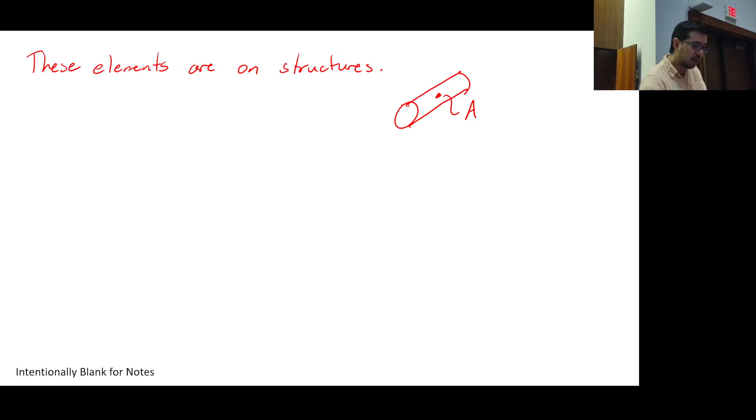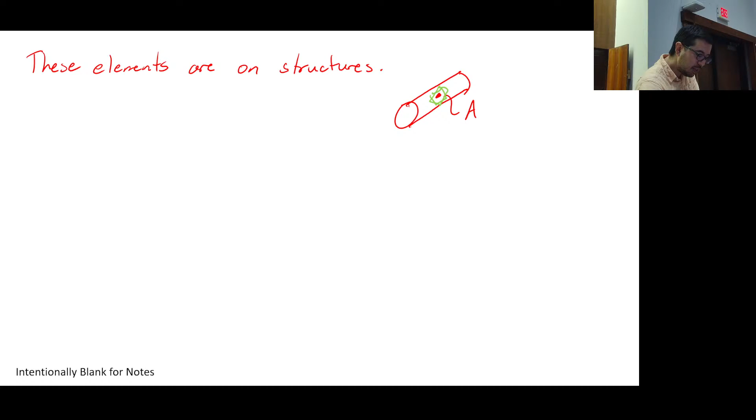So if it's a cylindrical cross section or a cylindrical pressure vessel, and I pick a point there and call it A, I have all kinds of options for how I would orient this element. I could orient it like this, I could orient it like this, I could orient it through the surface if I wanted.

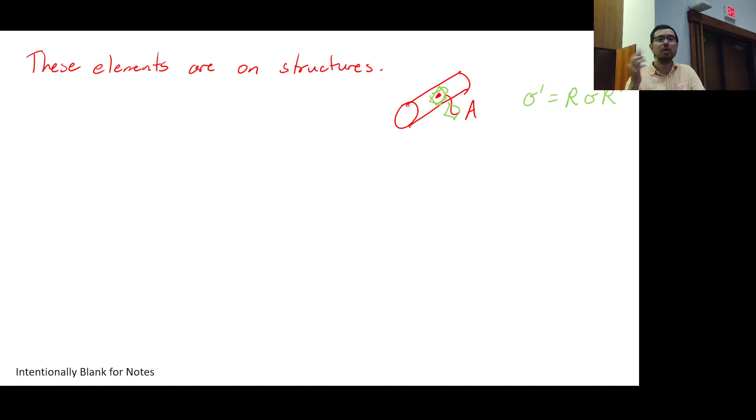As we were showing at the end of the last session and in the last homework problem, if you have a tensor sigma, we can use these rotation matrices to get sigma prime. And it doesn't just have to be about the axis normal to the page. We're going to spend a lot of time on in-plane stresses, that's kind of the scope. We've got enough issues to resolve in 2D, let alone trying to make it all 3D. So the first point is that these elements are on structures and they're at locations.

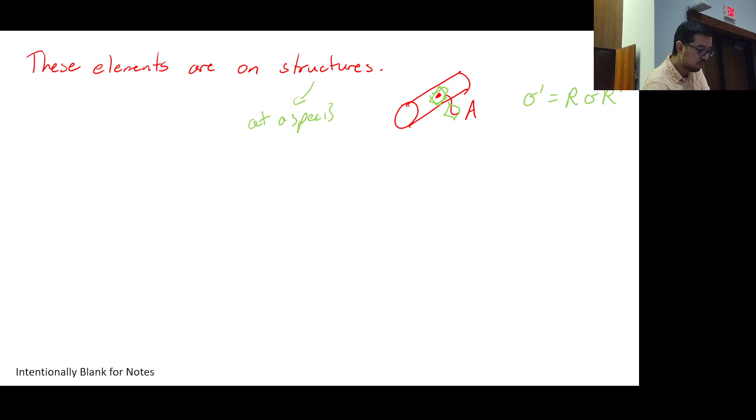And they're on structures at a specific location. And once we've got that worked out, then it becomes kind of just math, or some visualization of what's happening. What do I mean by that?

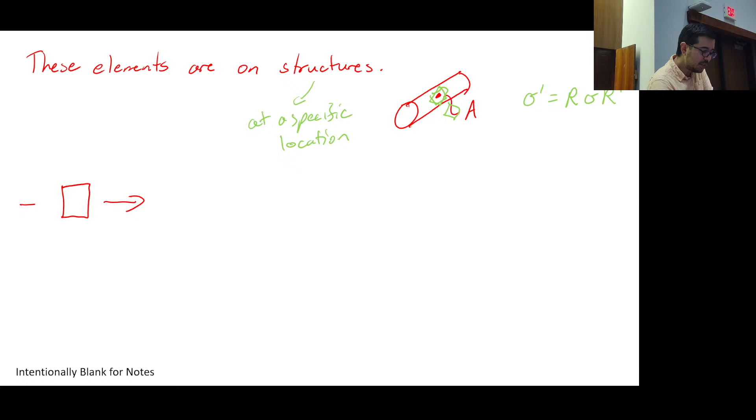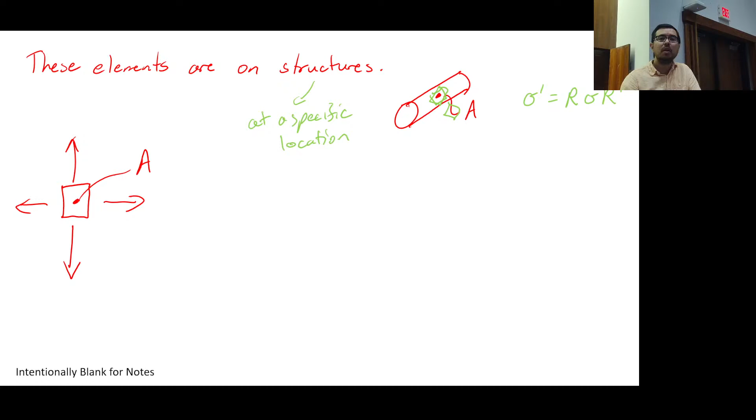I mean, if I've got this element, and I've got my state of stress, and it's something like this, then I kind of forget about the structure a little bit. Now I'm just in my little material world, and this would be that point A, if you will. But I've got to define my axes, X and Y, and then Z would be coming out of the board.

So we're going to spend a lot of time today, Tuesday, Friday, talking about what's happening just at some location. We're going to really be removed from these structures. Well, actually that's not true, we'll have this — yeah, the homework problems do talk about a structure at a location. But what we're really getting at is what is happening at these material elements, and in terms of when you rotate 45 degrees.

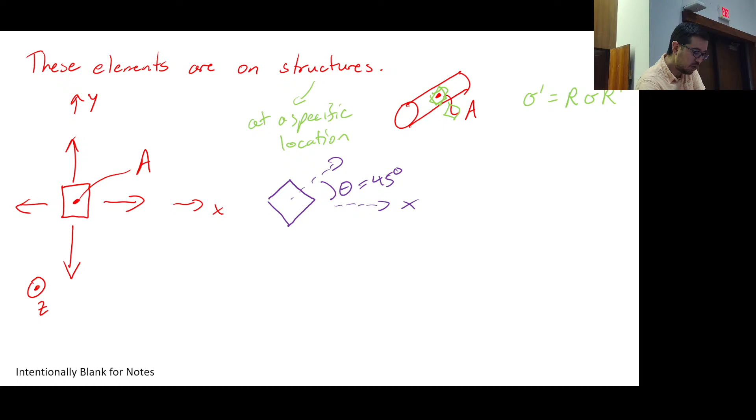You take this element and rotate it 45 degrees. What does that really mean? Well, we had our x like this, and now we've got this x prime, which could be the 45 degrees coming out. And we have our y prime coming out like this.

Yes, for this particular situation, we're going to have the buildup of shear stresses. I can say casually that the math says that's going to be so because we do the method of sections. But you're still going to have these normal stresses too. This is because experience and the math dictate these results.

Sometimes what you've got to think about is these stresses on the left, the sigma x and the sigma y, they're still present. It's kind of like these are your friends, and now you took your house that might have been right here, and said, oh, I'm going to twist it 45 degrees. This element, you could still visualize as being under these two normal stresses.

What's going to happen to your house? It's going to be elongated more in the vertical direction and elongated less in the horizontal — I meant to make the y's larger than the x's. It's going to be stretched more in the vertical direction than in the horizontal direction.

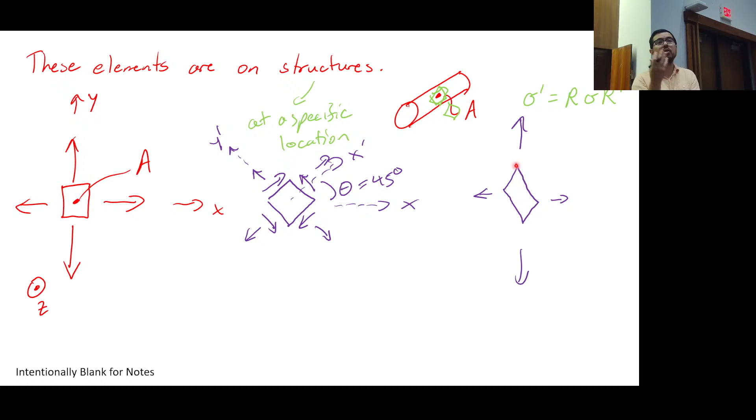Just taking a little bit of a step back and thinking about what we're doing, because we're going to spend a lot of time doing some of the math. Once again, for many of these questions, you've got to ask yourself: is it going up or down? Is it increasing or decreasing? Is it positive or negative? Before you even do the calculations.

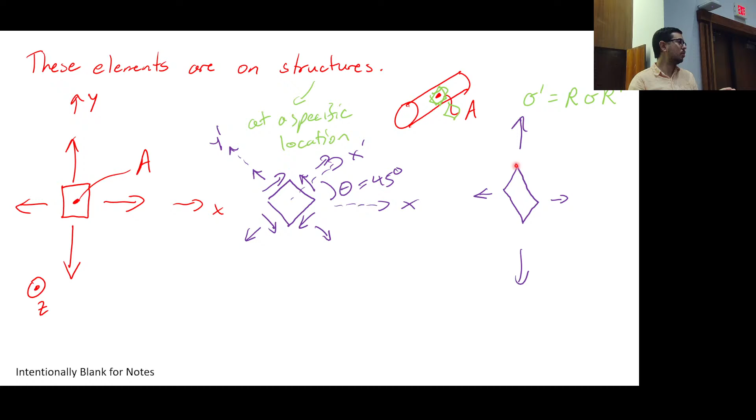All right, well, let's go. So today we're going to talk about what are called in-plane principal stresses, and also what are called in-plane maximum shear stresses. Then we're going to calculate these in-plane principal stresses and in-plane max shear stresses. We're actually going to calculate them in parts 1 and 2, but we're going to essentially analytically derive ways of calculating them in parts 3 and 4.

Let's take a look at a review from session 17. So we've got these elements, and we have states of stress, typically in 2D. So we have x, y, and z coming out of the board, so theta is about z, and we're typically rotating about z. So that we get again the sigma x prime, sigma y prime, and the tau x prime, y prime.

As we do this, it's probably not a bad idea to remember how the slicing relates to the angle of rotation. So if you have something like this, you're going to take a slice, and you see this was a smallish angle here, and down there a smallish angle too. You see that this surface we've created is going to be the surface of this new rotated material element — essentially the x prime face. So we see that's the angle theta there.

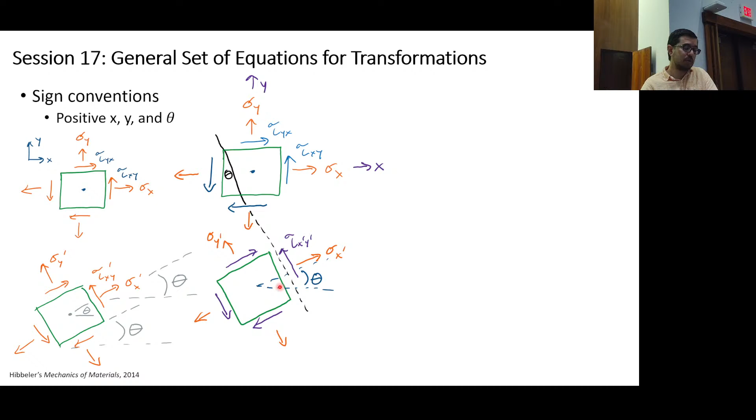We can draw the sigma x prime coming out of the x prime face and the corresponding stresses. We know that if we want to go between the sigma x, sigma y, tau xy, and the sigma x prime, sigma y prime, tau x prime y prime, the approach we have taken so far is to use equilibrium and the method of slices.

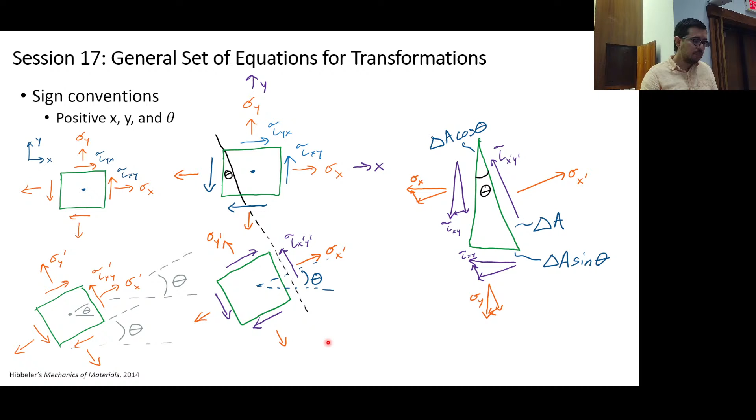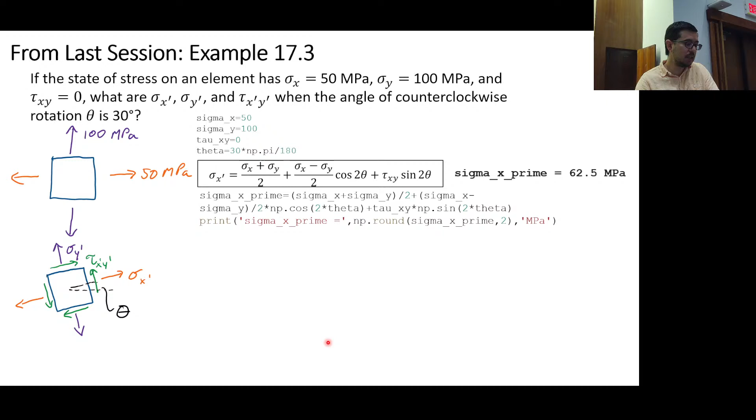Okay, so near the end of the last session, we said there are some generalizable equations. You don't have to do this breakdown every single time. Method of slices - we can just write out these equations, and then go ahead and calculate

what the sigma x prime, the tau x prime, y prime, and the sigma y prime might be. And when we do that - should I do it? Sure, we'll try. I don't know if we'll do it successfully, but let's see here. That's really small. Okay.

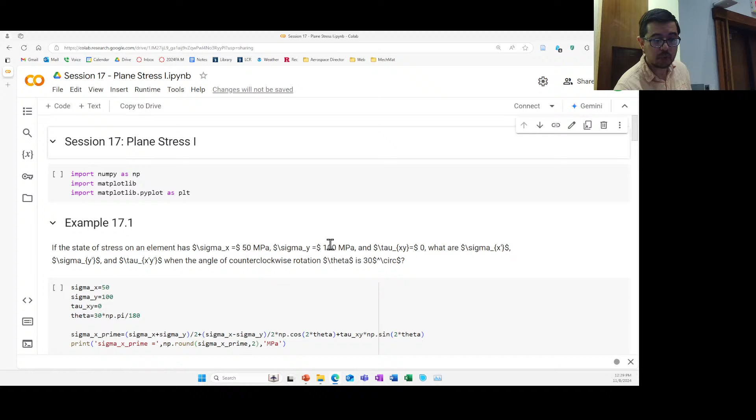So if we go to the website and scroll down over here, and scroll up - so we kind of did this already, but it's not, at least in videos afterwards, that tricky, to go ahead and run. That's just Control Enter. Is this 17.3?

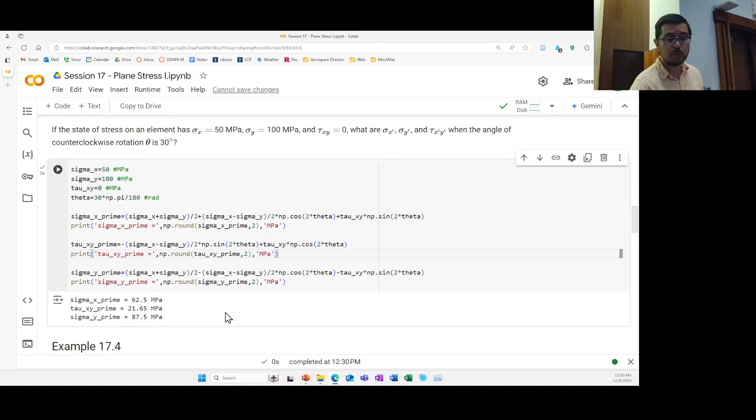Yeah, so we can go ahead and plug in our sigma x, our sigma y, our tau xy, and plug in an angle, and get a response - get the new sigma x prime, sigma y prime, and tau x prime, y prime. Or what we can do is run through a range of angles.

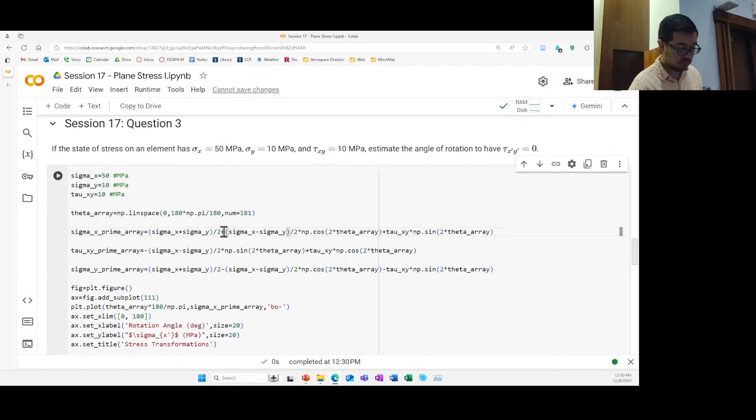So if you look here, do you see that we have a cosine 2 theta and a sine 2 theta? And so we're rotating - the angle is changing, we're rotating, okay?

In order to completely map out all possible solutions, what angles do I need to specify? Or what range of angles should I specify to map out all solutions? 0 to 180, right? Because I've got 2 theta there - 2 theta means 2 times 180 is going to be 360, and I'm just going to keep cycling around. So the math tells us that here, it tells us that here, and it tells us that here.

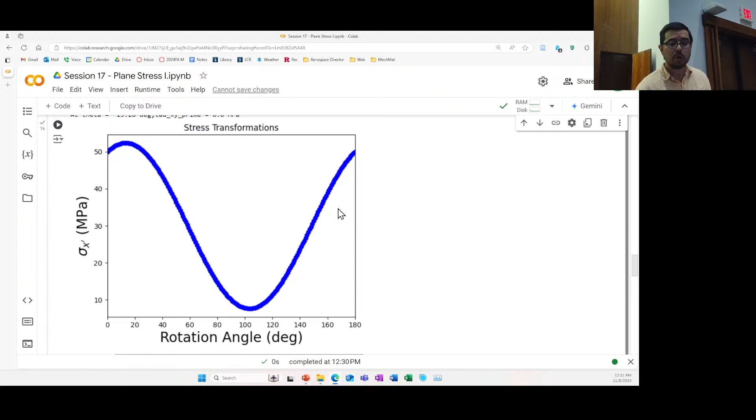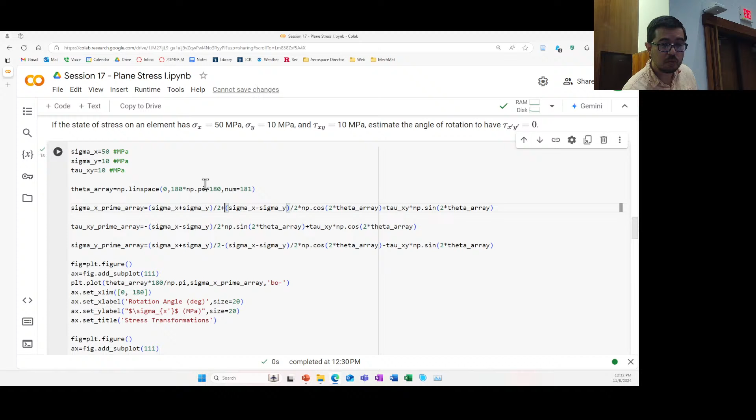And this 2 theta is going to come back in some other graphical depictions next time we meet. But the point is, when you're putting this into Python or whatever coding, or Excel, you can specify the range over which you're going to run these - we're doing 0 to 180. Now be careful, this is in radians. So if I want to go from 1 degree, I had to multiply by pi over 180.

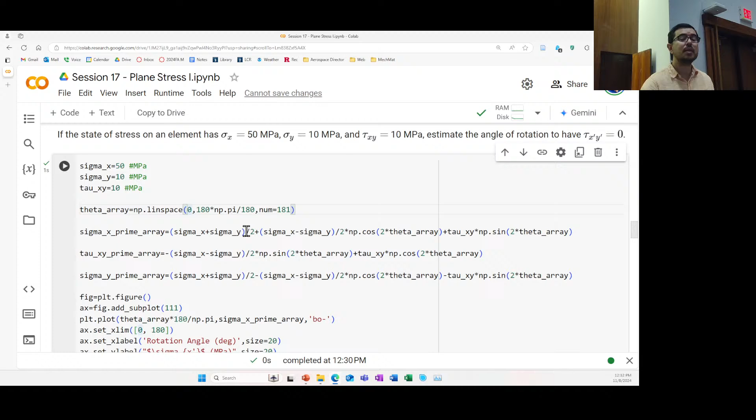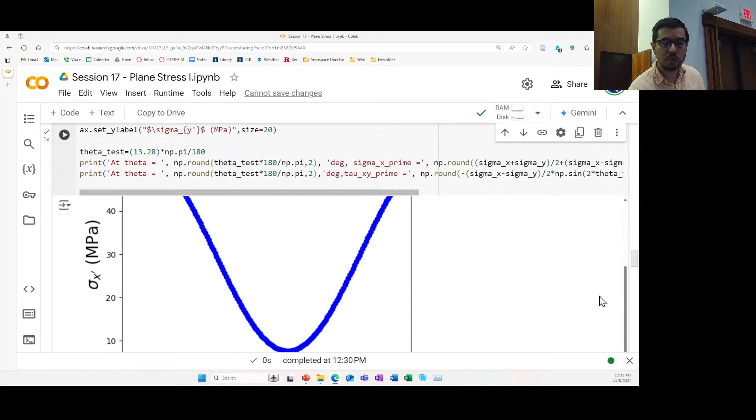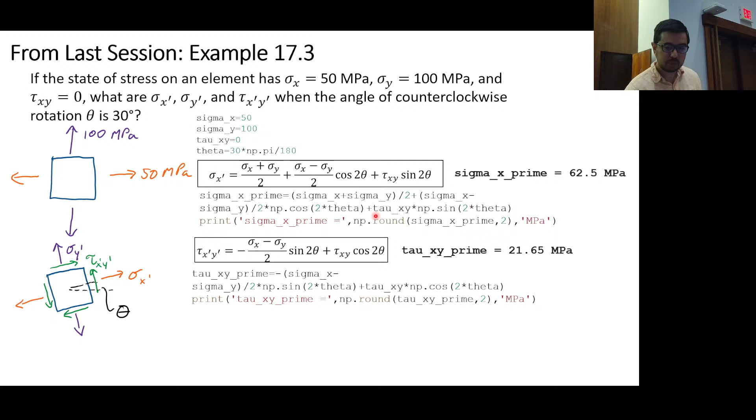Okay, because that's how NumPy is handling these trigonometric calculations. But you can see that if we go through the range like we see here, we're just going from 0 to 180. Okay, and then - okay, we come back here. Oops, wrong direction. Okay.

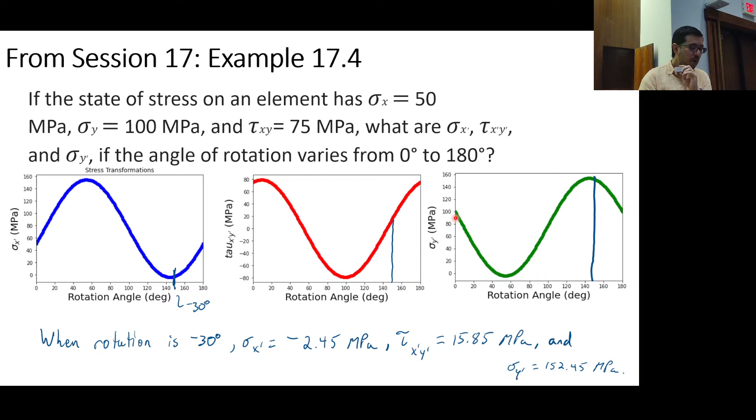Look at it—you're here, let's say I go 180 degrees, that's zero, and then I go 180 degrees again, boom, sigma x prime is back where sigma x was originally. Boom, tau x prime y prime is back where it was originally. Boom, sigma y prime is back where it was originally.

So if we look at what happens when you rotate an element 180 degrees, we started off like this.

Okay, this was sigma x, and this was sigma y up here. Now this sigma x is all the way over here, but this was sigma x already, right? It's now on the minus x face, the original x face, but that's the same. The sigma y is all the way down here, same. And the more confusing one is, what happened to tau xy? Look, they're pointing up here, and let's say this corner now goes down here, they're still pointing inside. So with 180 degrees rotation, you're back where you started.

I'm asking this because yesterday I was doing the homework, and I plugged in 180, but it turned part of the equation negative and gave me a wrong answer. So should we, if it's 180, always make it zero so that it's positive?

No, but there was also an error I corrected in one of the Colabs, so it depends on which one. There was one where sigma x prime and tau x prime y prime were correct, but I missed the minus signs in sigma y prime. I corrected it this morning. So if sigma y prime was giving you the wrong answer, it's because sigma y prime was not actually calculated correctly. I don't think so, but I could be wrong.

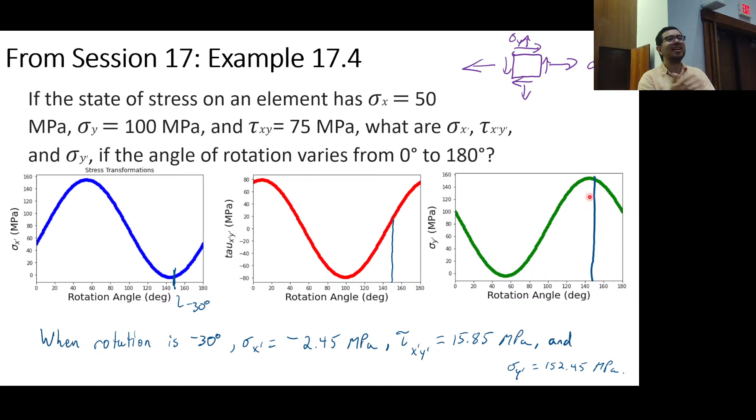I wish life were like that a lot of times. I just want that to work, but it doesn't work that way. In the lab, I have this philosophy that it never works the first time. And in life, sometimes I've gone through having low expectations and then I'm pleasantly surprised when things work out. But it turns out that's a bad way to approach life. You want to aim high.

Just to confirm, based on what we said, we were rotating it from the right to the left. In question 4 of the homework, where it says the axis becomes the y-axis, does that mean they were rotating the box this way? That's right, that's what I was trying to show in the video. Look, x and x prime are the same. I took a 2D element and made it 3D, and then we said it's flipping in this direction toward you, 90 degrees.

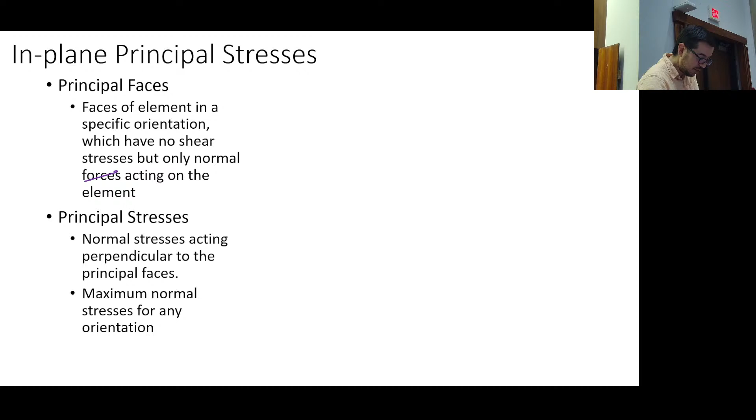So that was a long digression, but hopefully that was interesting for a few of you. All right, so in-plane principal stresses. What we're saying is that the faces of an element in a specific orientation have no shear stresses, only normal stresses acting on the element. Why did I say forces? That should be stresses.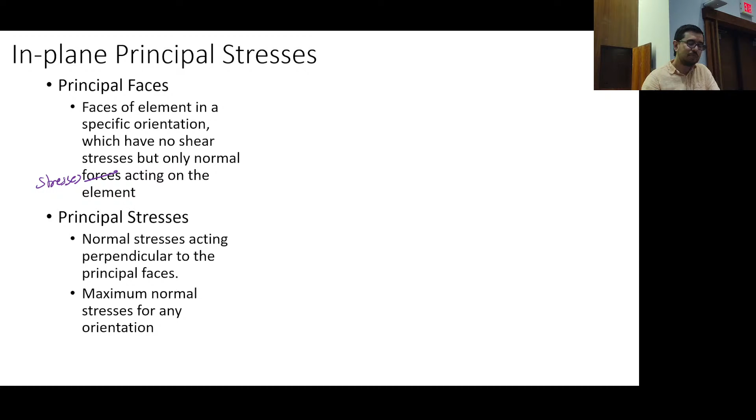Yes, we can associate normal stresses with normal forces, but we're talking about getting to a state where you have no shear stress. This is in-plane, so you can do this if you're given a 2D state of stress. So what we're saying here is that there's no tau xz, no tau yz, no sigma z. You have six stresses describing the state of stress in 3D. In 2D, we've only got three: sigma 1, sigma 2, and tau 1,2.

So we're saying we're going to figure out how to rotate this element by some amount, and we're going to call that theta sub p, such that we only have normal stresses. So that might have been sigma x. There's the angle theta p, and now we have our sigma 1 and our sigma 2.

This is where maybe a little bit of convention gets confusing. Yes, we've done sigma 1, sigma 2, sigma 3, sigma 1,2, sigma 1,3, sigma 2,3 for FEA. Now, even just 2 seconds ago I said sigma 1, sigma 2, tau 1,2, but now, very specifically, sigma 1 and sigma 2 refer to what we call principal stresses. And there's no need to describe a tau 1,2 because tau 1,2 here is 0 — the shear stresses are 0.

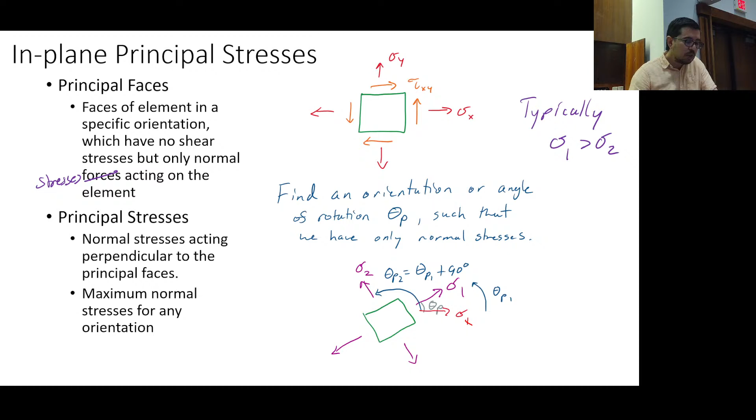So let's go ahead and do a little example. Here we have — and it's clear, right? Anytime tau xy is not 0, that is not the state of principal stresses, because tau is not 0. So if they give you tau equal to 0 there, then you're like, what am I doing?

Probably trying to find maximum shear stresses or something else, which would be 45 degrees — but anyway, we'll talk about that later. Here we have sigma x equals 50 megapascals, sigma y is 100 megapascals, tau xy is 10 megapascals. So what are the in-plane principal stresses, and what is the associated angle of rotation?

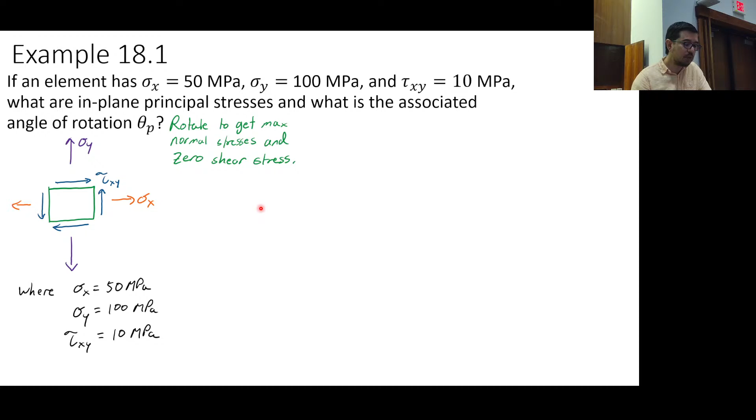So this is in plane. So we got to rotate to get max normal stresses and 0 shear stress. So we want to do something like this. That's our goal, and we got to figure out what that theta p is to do that.

One way to do it is the trial and error method, or the brute force technique. So we go into Colab, and you can do this — I played with Colab a little bit. We better keep going though, I better not go to Colab right now.

And that's my angle, and that's going to be my principal stress, theta at theta p1. Okay, just like that. Yes.

Could we just do what we did in question 2 of 17, where you find where tau x prime y prime is equal to 0, and then you get an angle? You can do that too, right? So that's another way to look at things, right? And theta p2 will be 90 degrees out, right?

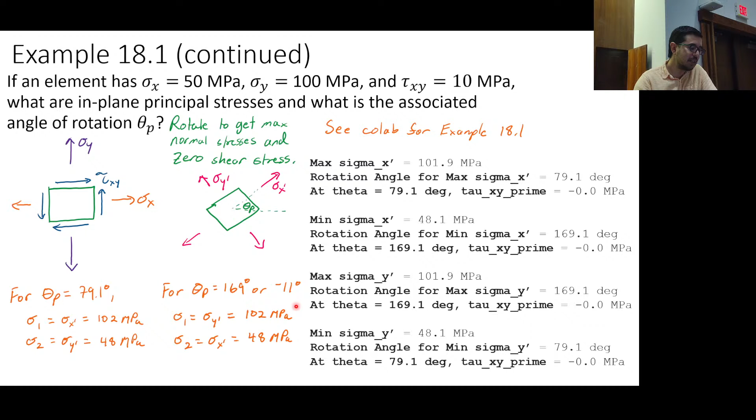And so we have these other principal stresses, which are the same as they are here. Okay, but notice that now sigma 1 is sigma y prime instead of sigma x prime, and sigma 2 is sigma x prime instead of sigma y prime. Okay, because we rotated the other direction, or we rotated another 90 degrees. Right, you see it's 169 degrees or minus 11 degrees to get there. Great. Questions? Okay.

Now, here's another one. Okay, if an element has sigma x equals 50 megapascals, sigma y equals 100 megapascals, and tau xy equals 0 megapascals, what are the in-plane principal stresses and what is the associated angle of rotation?

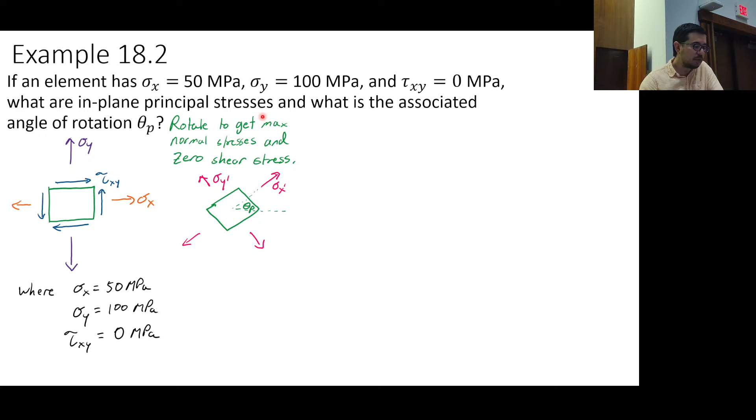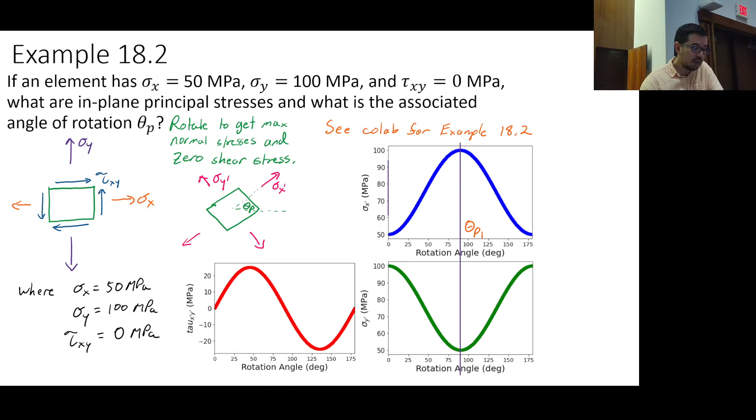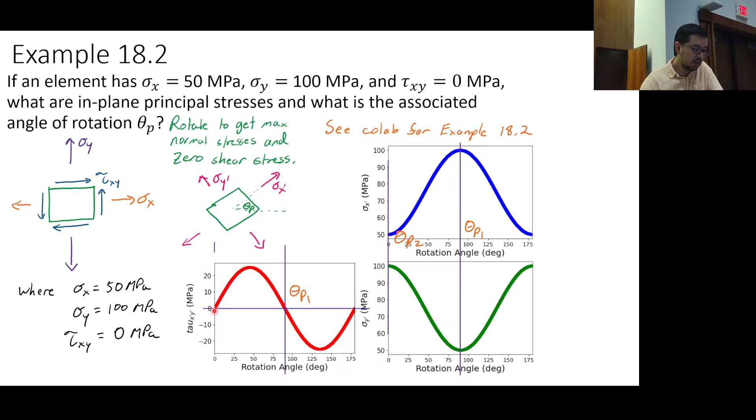Okay, so here, all right, we already have tau xy equal to 0, okay? And so we can go 90 degrees off of where we are, okay, but we were already there, okay? And we can see that here. So this is at 90, this is at 0, okay? So, yeah, we can go 90 degrees, okay?

But there were no shear stresses in the original orientation. So we just get these original values, like our sigma 1 is 100 megapascals, our sigma 2 is 50 megapascals, right? But then they just flip the sigma y prime and the sigma x prime as we go to 90 degrees. All right, any questions on that?

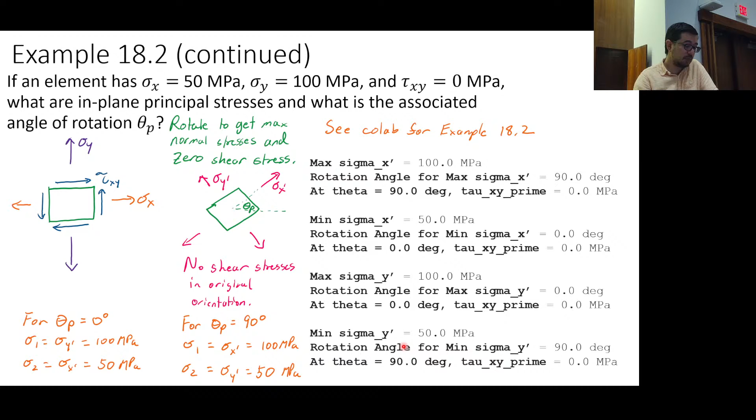So these are probably the easier of the two to understand because the next ones we're going to look at are the maximum in-plane shear stresses. Okay. And there's a question. So let's talk about what the maximum in-plane shear stresses are.

Well, this is rotation to create a state with maximum shear stress. And like I said a few minutes ago, the normal stresses in this rotated state do not necessarily go to 0. They could if it's pure shear, but given that most systems are not pure shear, I don't know. I guess it depends. It depends on what area you work.

If you are a shaft expert, then okay, what goes on your desk is going to have a lot of shear, pure shear. But if you're designing structures that are not just twisting, and I'm not judging one job over another, right? We need people who specialize in things and figuring out the material content, how do you machine these, how you get the surface roughnesses on shafts, all these things, how do you make sure the density is constant, how do you get rid of the eccentricities, make sure things are centered.

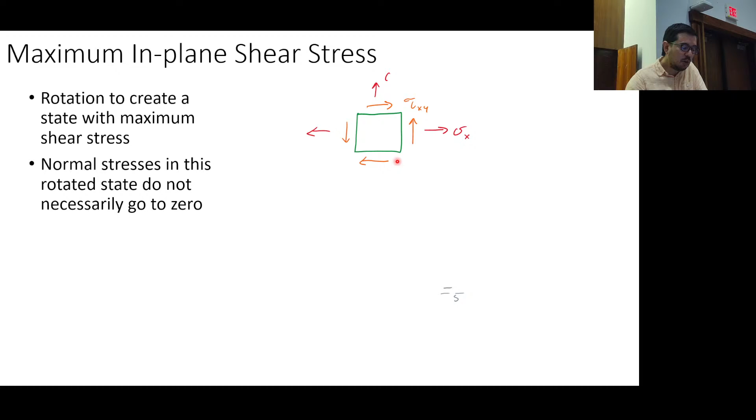There's a lot you might take for granted on a shaft. Don't shaft the shaft.

All right, so here we have a state of stress, and what we're going to do is find an orientation or angle of rotation, theta s, such that we have maximum shear stress. What's cool here is that we're only looking at one quantity, shear stress. When we have the principal stresses, you have a sigma x prime and a sigma y prime, and so you get a sigma 1 and a sigma 2.

Here, we want to figure out what the maximum shear stress is. Now, often we do figure out what the sigma x prime and sigma y prime are associated with that rotation of maximum shear stress, but really, we just care about the tau.

So it's a very similar diagram in that we have some theta sub s that we're going to try to get and achieve, and then we're going to have tau max, and we're going to have our sigma stresses associated with it.

And then once again, it's like a broken record. Theta S2 is going to be 90 degrees out of phase with theta S1. You can interestingly see things. Remember how we said there were two theta components in the stress transformation equations, and so we only had to go from 0 to 180.

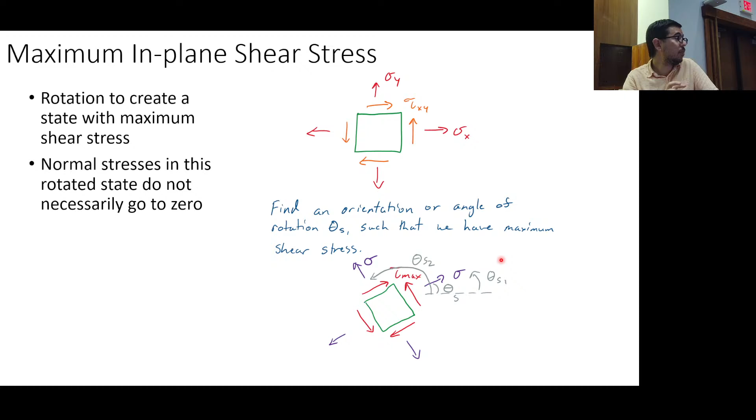So here, if we have an element, we're essentially just repeating the same thing. We're doing brute force again - put in an array of values for the thetas, and pick the one that gives you the maximum shear stress. That's what we're going for, and figure out what that orientation might be.

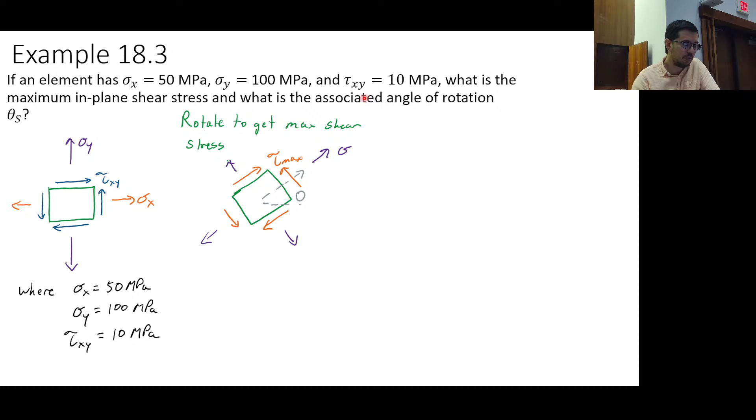So here we have sigma x equals 50 megapascals, sigma y equals 100 megapascals, and tau xy equals 10 megapascals. So we're going to rotate to get maximum shear stress. This is just a general description of what we're doing. We've got to figure out what this theta s is. You can look at the colab there.

And when you do that, these are the plots you're going to get. So where do we see the maximum shear stress? What do you all think? Can you see that? Is it too small? What angle would you take a stab at? Where is this thing maxing out?

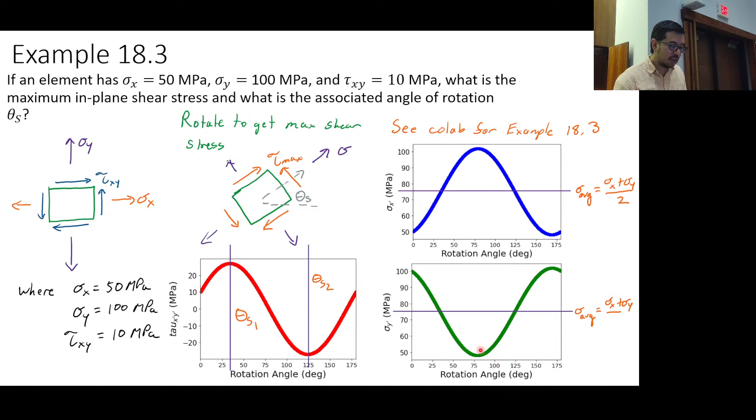And we see that the normal stress at these values is going to be something like this - it's the average. This is very interesting. What you're going to find is that the sigma x prime is the average of sigma x plus sigma y, and the sigma y prime is also going to be the average of these two.

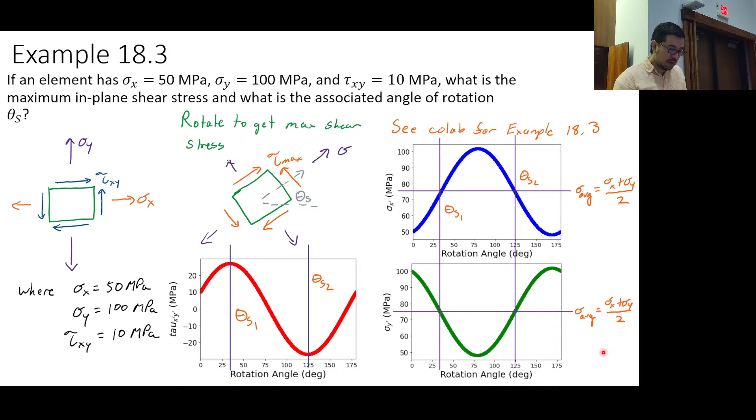So if you go ahead and do the math, you're going to find that the angle is 34 degrees or so. The tau max is 26.9 megapascals, and if you go another 90 degrees, you get the minus of that - minus 26.9. In both cases, the sigma is the average, so those normal stresses, sigma x prime and sigma y prime, work out.

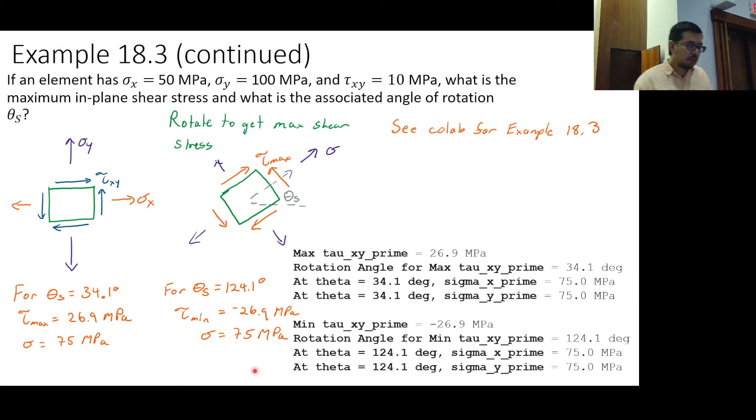All right, so let's talk now a little bit about the relationships between theta p and theta s. If you look here, this is just a general thing - what would you say is the offset between theta p and theta s? Yeah, 45. It's 45 degrees. So once you found one, you know the other one is going to exist 45 degrees off from it, and then you'll get another of the same if you go 90 degrees.

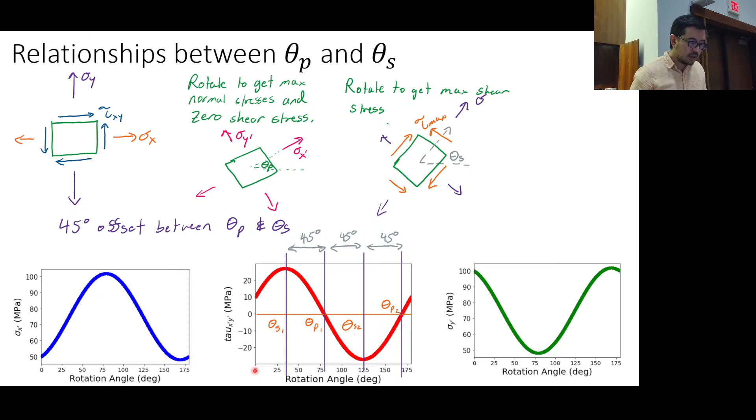So this is an interesting property - 45 degrees is what separates the maximum in-plane shear stress orientation from the maximum normal stress, or the principal stress orientation, and vice versa. A little bit more on in-plane maximum shear stress.

Shear without normal stress is possible in a special case of pure shear. This is the structure, this is pure shear on a rod that's being twisted. This is the element under pure shear. You see that? Purposely, the sigma x and the sigma y are 0.

So then the orientation of maximum shear may still have normal stresses present. Yes, that's true, but this is not. So this case is separate from this case. Just to be clear, or maybe it's not, let me just make that distinction. This is separate, so this is one case, a special case.

And that's what we're describing over here. This is pure shear. And you see this? Then we rotate this 90, or we rotate it 45 degrees, and we get to what? The normal, the state of principal stress.

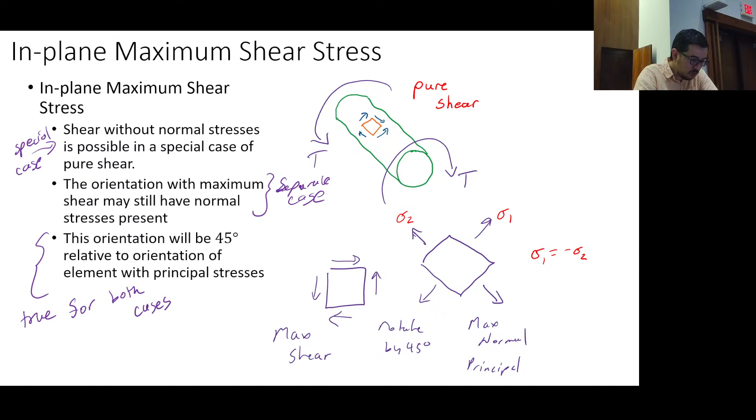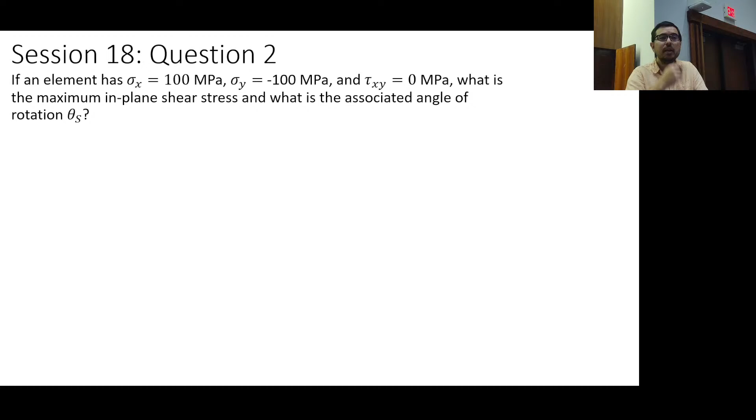Any questions on this? So this slide is just saying, look, there's a special case of pure shear. It's cool, be careful. And then the last part is just repeating what we already knew, that the state of principal stress is going to be 45 degrees off of the case for maximum in-plane shear stresses. And then there will be another question that you get to work on. You don't need me for some of these, you can just go ahead and modify a Colab if you like, and solve for these problems.

Let's talk about a little bit of calculus that allows us to come up with analytical responses to avoid shooting darts at the board to figure out where are the peaks. And if you had to guess, how do you find in calculus a local maxima or minima of a function? Yes, Stephen. Yeah, exactly, take the derivative and set it equal to 0. All right, so that's all we're going to do.

We're going to say, and you're like, why didn't we do this earlier? Well, because we were just trying to illustrate the physical nature of these rotations, and now we're shortcutting to get answers. But we've already done the physical work, we've exercised our mental physical capabilities.

So here's sigma x prime, this is the equation, the generalized transformation equation for x prime. And if we want this to be a maximum, which is what we want for the state of principal stresses, we take the derivative of this expression with respect to theta, because that's what we're varying. Yes, sigma x and sigma y can vary, but in this case we've got our sigma x and our sigma y pinned, those are constants.

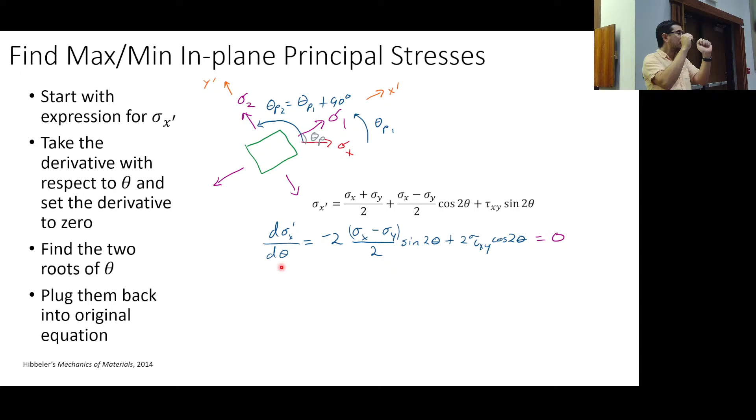The same thing with tau xy. The dependent variable is sigma x prime, of course, and the independent variable, the one on which we depend, is theta. So we're taking the derivative with respect to theta because we're trying to figure out what's that angle that gets us there. So this term drops away, this coefficient stays, but we have cosine 2 theta becoming minus 2 times that, and the sine theta becoming cosine theta, and the 2 from the inside coming out.

So we've taken the derivative, we're setting it equal to 0, and then we've got to solve for theta. We can write it out like this. We see a sine, we see a cosine, they're on opposite sides. Sine divided by cosine is tangent. So we get now an expression, tangent of 2 theta is equal to this mess. And we can say that now theta is going to be equal to theta P1 or theta P2.

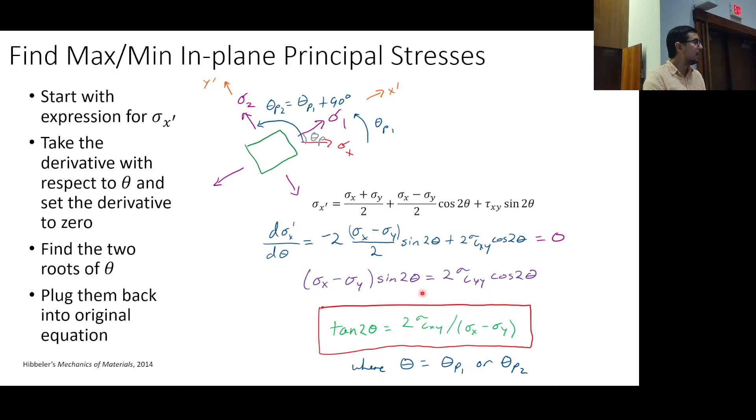This is not an equation that I go home and dream about, it's just useful. Maybe you'll see why once we do some other things later on. This is not how I think about these problems, and not how you'll think about them after this exam, or maybe even after the next session.

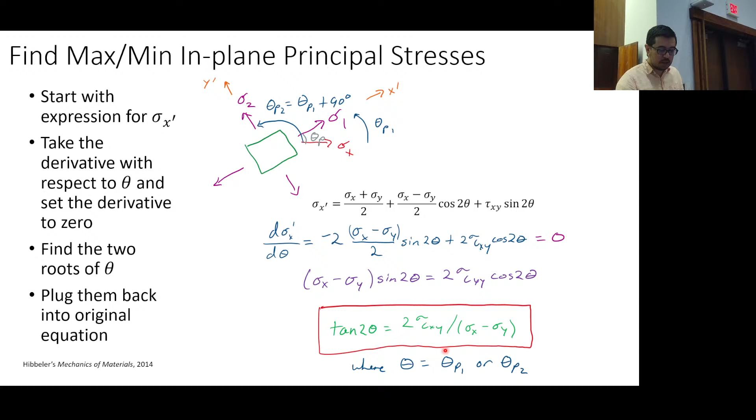But this equation exists, and we can plug in. This is the equation that's going to dictate the angles of rotation, and we can do something kind of fun with it. Not something I'd do on a weekend, but we'll do it on a weekday.

You see we have this expression, tangent of 2 theta, and we can rewrite it as tau xy over this quantity. What is the definition for tangent? SOHCAHTOA, right? Do people still talk about that? I don't really remember what it means, but for the longest time I was like, what is this opposite and adjacent stuff? Anyway, we can think of tangent as opposite over adjacent.

So what you do is make a little triangle, not a unit circle. You have 2 theta here on the inside for the angle, and we say the opposite could be tau xy, right there. And the adjacent is just sigma x minus sigma y all over 2, so that's down here. Then what is the hypotenuse? Pythagorean theorem, right? So it's the square root of these terms. Yes, you could put it on the other side, but this is the hypotenuse on this side.

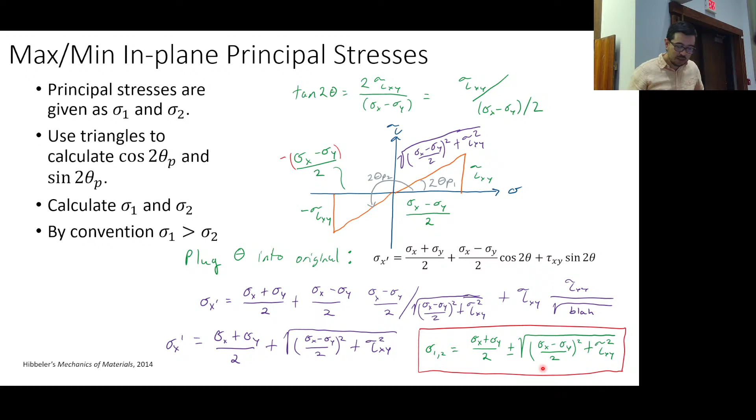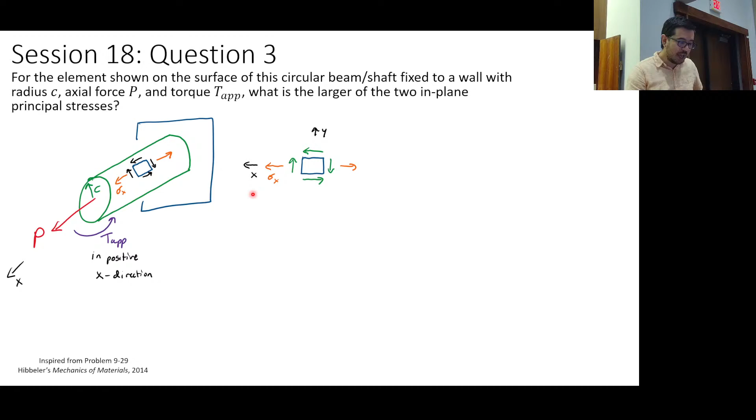Okay, the last frontier is calculating in-plane maximum shear stress. What are we going to do? We're going to do the same exact thing we did: look at the equation for tau x prime y prime, take the derivative of that expression with respect to theta, set it equal to 0, and figure out what that angle ought to be.

And of course, if we go out of phase, we go 180 degrees. This is interesting: remember, we're going theta 90 degrees to get to the other theta s. If we have one theta s1, remember we said you go another 90 degrees to get the other theta s2. But we have 2 theta here in our trigonometric equation, so 2 theta is going to correspond to 180 degrees.

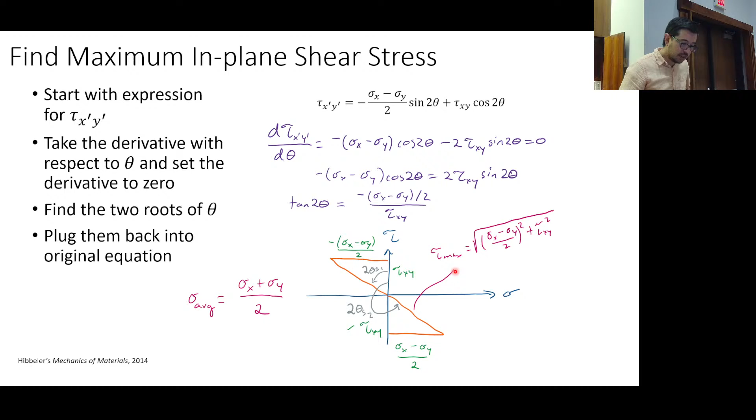So here's that tau, our tau max, and there's a sigma average, and these are the equations that you have there. Any questions?

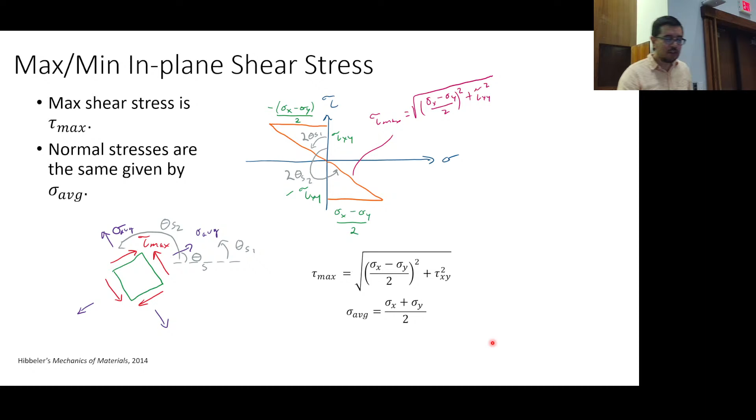So what did we learn today? What if you go home on the weekend? Just hypothetically, we are in New Jersey, and a lot of times that happens. It's very nice for you all. That's great, I live here, so I go home. But what are you going to tell your parents that you learned this week in Mechanics of Materials, or your loved ones, or your enemies, whatever you have? Someone, or the mirror, you can talk to the mirror. That's fine. All right, what do we learn this week in Mechanics of Materials?

What did we learn on Tuesday? What did we learn today? What are your thoughts? What did the hundreds of dollars that you just spent in these classes, what did you learn? Or why is it useful? Am I allowed to ask that question? No, come on, someone give me an answer. Make me feel a little bit better before we go into the weekend. What is one thing that we learned, in your own words, or mine, what is one thing that we learned this week?